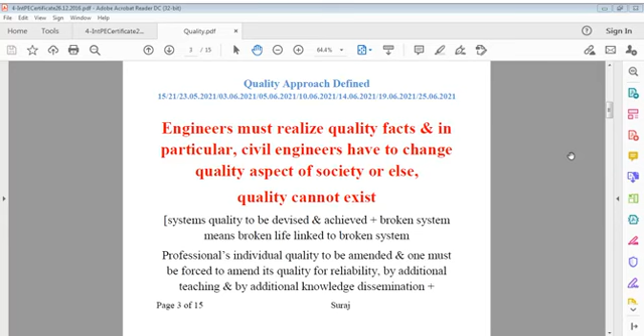Therefore individuals' improvement and update on knowledge are significant factors. Professional individual quality has to be amended or improved, and one must be forced to amend its quality for reliability achievement by additional teaching and learning, and by additional knowledge dissemination, which is a responsibility of everyone. A relevant element or product's defined quality has to be achieved.

Attitude of an individual must be streamlined. Streamline here is a very important term - the stream of profession, stream of activity, must be brought to a certain line on which your quality criteria is defined. At least it must be brought to that line. If it doesn't go above that - well, if it goes above that, it's valued.

Individual's dedication has to be applied on actions. You cannot go without that. And if you go without that, you do not really work - you just waste time, waste material, waste everything.

Commitment towards work is very important. It has to be made, it has to be fulfilled for the purpose of successful production and delivery, and all other parameters to deal with what requirements are to be done.

It's easy to say I designed this. Very easy to say, okay you designed it, fine. That is your exclusive input of your knowledge, of your application of experience and theoretical knowledge. But otherwise, experience is very important. Every individual learns something on the job. Some learn everything, and somebody doesn't work at all and doesn't learn anything.

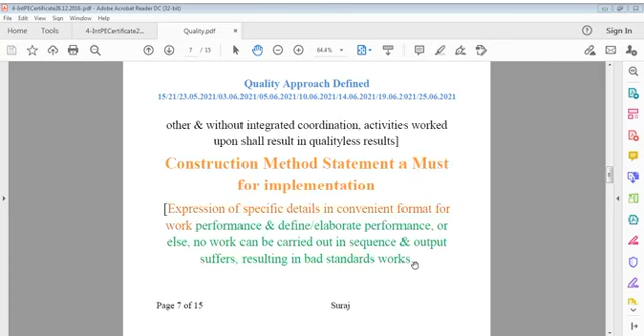No need to explain again and again, it is very important. Cost is very important. Time is very important. Risks are very important, which you have to know based on your pragmatism, based on your vision. What shall we face as problem if you don't do this? And if you do this, to what level can we solve our problem? This means you have problems as input, you have solutions as output, and that solution is given after conducting a lot of study of analysis, a lot of study of dependability of this product's nature.

Then we can say risk can also be classified based on cost, based on time, based on considerations. Risk must be foreseen, it can be foreseen by an experienced person, for the purpose of resolution, for the purpose of removing damages. Damages are not tenable and must be taken care of in advance.

Those engineers who are experienced, who have real experience, they enjoy work, they never weep, they never cry. Inexperienced engineers may prove inefficient in such situations because they could not foresee, or they cannot foresee. It will take time for their development. You can say risk is very important to be understood.

Risk-based emergencies must be understood. Therefore, thorough deliberations or brainstorming must be conducted based on available data input. Risks must be clearly defined to reach its resolution and to convert work inconvenience to work convenience.

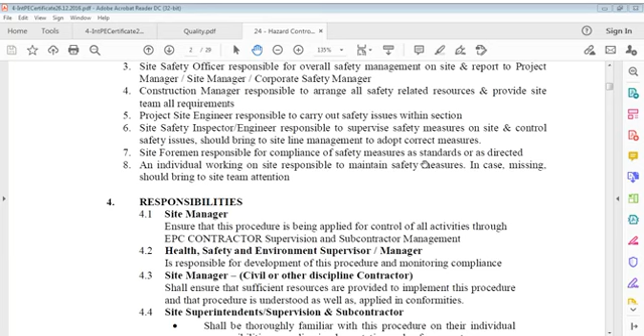It's a very important point that we could not understand what this hazard is. If you could not understand this hazard, then what is hazard, you can say. What is hazard? Why do you call it hazard? It's something undefined. Hazards are something that's undefined, and it may depend on person to person, from person to person.

It's really an important point that we have to understand how hazards can be dealt with, how the unforeseen can be handled. It's kind of unforeseen, something like this happens, and until it happens and is experienced, then hazard can be replaced by something else. Important point. We always say job hazard analysis, this analysis. We can say we do that, but is that enough?

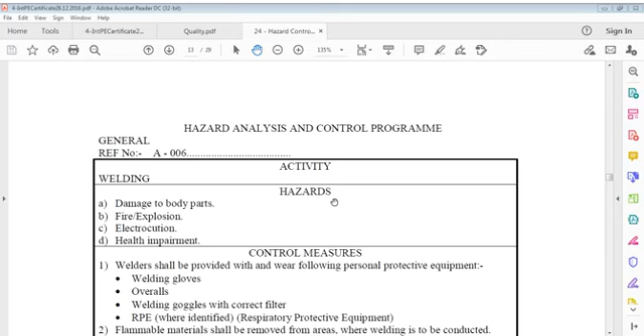Now it's term of safety, because I have talked on the issue of quality, issue of some related safety we have gone through. Now we come to the topic that is safety, health and environment.

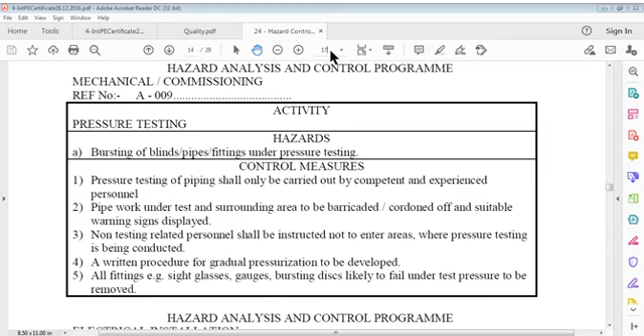Safety is not so simple. First of all, one should be serious about that. If we are not serious, we shall make others non-serious.

Safety is not so straightforward. It plays with everybody. It also sometimes makes someone be serious and risky. Those should not, but persons feel like that, because it gives some bother sensation also. It gives some improper feeling also to everybody. And after all, it's important in all work conditions.

It may be work in office or work on field. Of course, work in office is not physically oriented but mental oriented. You have to bear safety everywhere. You have to bear risk everywhere. There is no place on earth where some kind of safety is not involved.

It's very important. We have to understand safety input, and that's the reason that I try to collect whatever I can from the store of my experience and share whatever right or wrong knowledge I can share with you.

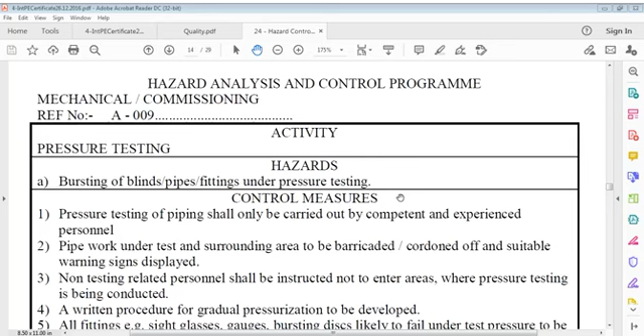We have to consider pressure test. Well, I think we did it before also. Pressure testing, we did in welding as well. There are so many classes of welding, and we can consider that. I still remember that time we talked of something likewise. Well, I think pressure testing, was it there or no?

Hazards controls, there must be a document. I think we did it. Let me check if I can find it for you, because it doesn't cost much except for seconds. It means sometimes you have to also divert your time to attainments, and it must be there.

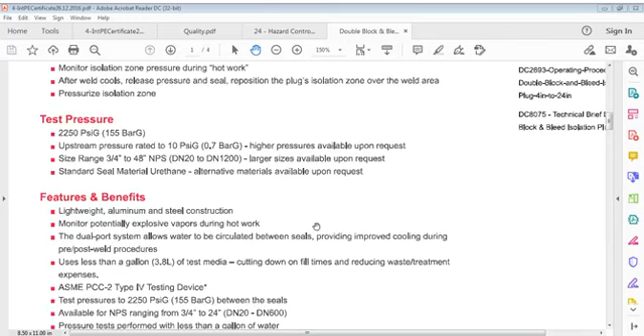And there's a little explanation, no problem. If it's effective, little is also good. I should not say everything should be according to our wish. We must say this.

Safe and effective pipe testing, let us say. Double block pressure testing, I can say here. Pressure testing. I can just save it for better understanding.

In addition, the volume of water required for a test is so small that testing can be accomplished using a hand pump.

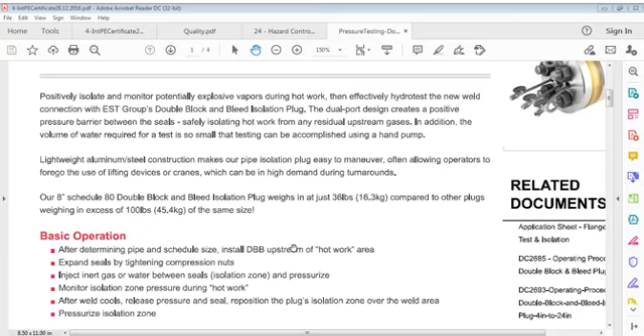Basic operation: after determining pipe and schedule size, install DBB, that is double block and bleed, upstream of the hot work area. Expand seals by tightening compression nuts.

Inject inert gas or water between seals into the isolation zone and pressurize. Monitor isolation zone pressure during hot work. After the weld cools, release pressure and seal. Reposition the plug's isolation zone over the weld area and pressurize the isolation zone.

These are basic operations. I will repeat after this.

Test pressure is 155 bar G. Upstream pressure rated to 10 psi G, or 0.7 bar G. Higher pressure available upon request.

Size range is 3/4 inch to 48 inch NPS, DN20 to DN1200. Larger sizes available upon request. Standard seal material is urethane, with features and benefits including lightweight aluminum and steel construction.

Monitor potentially explosive vapors during hot work. Dual port system allows water to be circulated between seals, providing improved cooling during pre- and post-weld procedures. Uses less than a gallon, 3.8 liters, of test media, cutting down fill times and reducing waste treatment expenses.

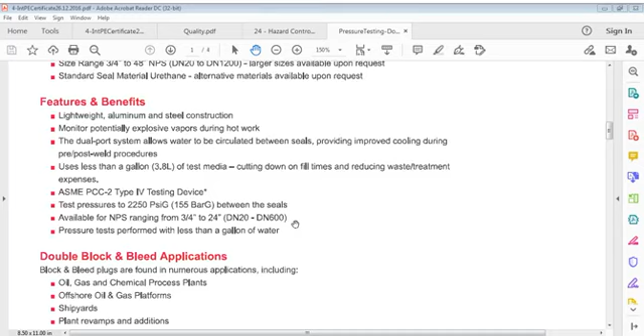Double block and bleed application. Block and bleed plugs are found in numerous applications, including oil, gas, and chemical process plants, offshore oil and gas platforms, shipyards, plant revamps and additions, piping systems, pumps, pressure vessels with flanged connections, flange replacement programs, and performing pressure tests.

Let me read first all these pages. There are a few steps in that. Step 1: now perform the steps outlined below when conducting a pressure test on 3/4 inch to 3 inch double block and bleed.

Perform the steps outlined below when conducting a pressure test on 3/4 inch to 3 inch double block and bleed isolation plugs. Step 1: attach hoses to pressure and upstream monitor connection plugs.

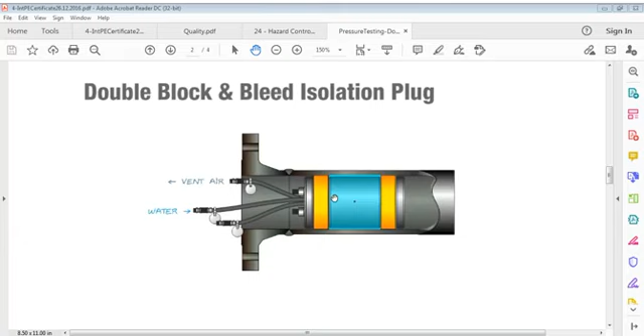So we can, we'll see this later now. Let's go back and see again. So we have to explain this in fact.

We should understand this very well before doing anything on this.

Title is double block and bleed test. It says isolation plug.

Also, I would like to see if I can find more information from here. I think I saved this file. I made this file safe. Let us see if I made it safe or not.

It must be likewise pressure testing. So I've done it, is it? I've done it, pressure testing. Let me see. No, I think I've not done it. Possibly I'm wrong. No, pressure testing, I've done it. Okay, so I've done it. So I'm a little confused with that.

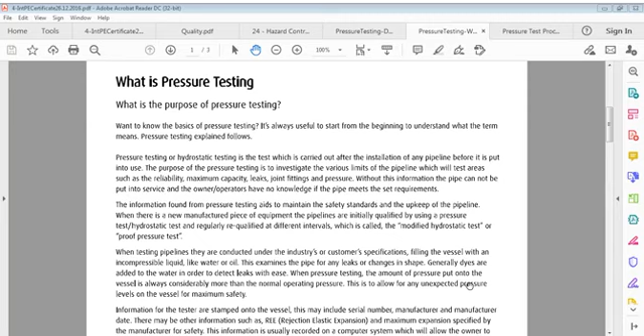We can go back to this and we can remove this from here. So we continue, like we have 3 files more here. I like to, well, let's say, what is pressure test? We can say was pressure test. Pressure test, what's that? Want to know basics, want to know basics of pressure testing. It's always useful to start from the beginning to understand what this term means.

Pressure testing explained as follows. Pressure testing or hydro testing is a procedure which is carried out after installation of pipeline before it's put into use. Means it's a procedure that's done after installation of pipeline before it's put to use.

Purpose of pressure testing is to investigate various limits of pipeline, which test areas such as reliability, maximum capacity, leaks, joints, fittings, and pressures. Without this information, pipe cannot be put into service, and owner-operators have no knowledge if pipe meets set requirements. So very easy.

Means we have to test pipe before it's put into use or it's commissioned, and after it is installed, we have to test what level of pressure it can take, and how strong it is, how reliable it is, what maximum capacity it can take, and what's the leakage status, joint fitting, etc.

This was required. So the information found from pressure test aids to maintain safety standards and upkeep of pipeline. When there is a new manufactured piece of equipment, pipelines are initially qualified by using a pressure test, hydrostatic test, and regularly requalified at different intervals, which is called modified hydrostatic test or proof pressure test.

Okay, now, is pneumatic testing more dangerous than hydrostatic testing? However, once you have successfully laid an underground pipeline, I'm just superimposing this reading.

Once you have successfully laid an underground pipeline or carried out all required hot work such as welding or post-weld heat treatment, you need to conduct a pressure test to ensure the mechanical properties of the pipe haven't been downgraded. There are two primary methods used for pressure testing: hydrostatic and pneumatic. The former is performed using water as the test medium, while the latter utilizes air, nitrogen, or another non-toxic, non-flammable gas to complete the inspection.

There are other differences between these two testing methods that need to be considered to choose the right option for a given application. Interestingly, pneumatic testing is considered more dangerous of the two options, as the amount of energy stored per unit volume of compressed air under test pressure is relatively high. As a result, pneumatic testing is only recommended for low pressure applications, and all inspections must feature detailed safety precautions and be overseen by senior staff. You must also ensure you have approval from the relevant authority to carry out a pneumatic test, otherwise you shall find yourself in breach of existing law.

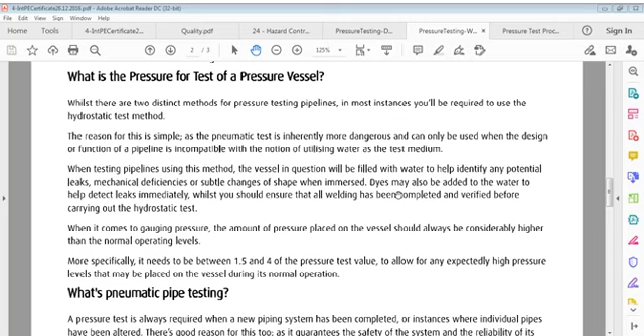When it comes to gauging pressure, the amount of pressure placed on the vessel should always be considerably higher than the normal operating level. More specifically, it needs to be between 1.5 and 4 times the pressure test value to allow for any unexpectedly high pressure levels may be placed on the vessel during its normal operation.

What's pneumatic pipe testing? A pressure test is always required when a new piping system has been completed or in instances where individual pipes have been altered. There's a good reason for this - it guarantees the safety of the system and reliability of its operation, while also identifying potential leaks. Usually pressure testing is carried out after all hot works and welds have been completed on a piping system, since post-weld heat treatment is capable of downgrading the mechanical properties of individual pipes.

There are different types of pressure tests that can be used, with pneumatic testing using air or an inert gas like nitrogen to pressurize the pipeline to 110% of its intended design capacity. The gas is then kept in the pipeline for a sustained period of time in order to gauge the system's ability to operate safely and efficiently at its maximum capacity.

Ground Force are one of the UK's and Ireland's leading suppliers to the construction industry.

Leave it now, see, we'll see. So I think Ground Force has gone. So this I can close now, pressure testing. Now we'll see pressure.

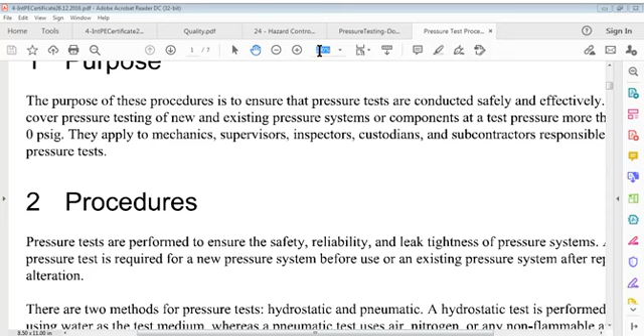What is the purpose of pressure testing? The purpose of this procedure is to ensure that pressure testing or pressure tests are conducted safely and effectively.

This covers pressure testing of new and existing pressure systems or components at a test pressure more than 0 PSI. It applies to mechanics, supervisors, inspectors, custodians and subcontractors responsible for pressure tests.

Pressure tests are performed to ensure safety, reliability and leak tightness of a pressure system. A pressure test is required for a new pressure system before use, or an existing pressure system after repair or alteration.

There are two methods for pressure tests: hydrostatic and pneumatic. A hydrostatic test is performed using water as the test medium, whereas a pneumatic test uses air, nitrogen, or other non-flammable and non-toxic gas.

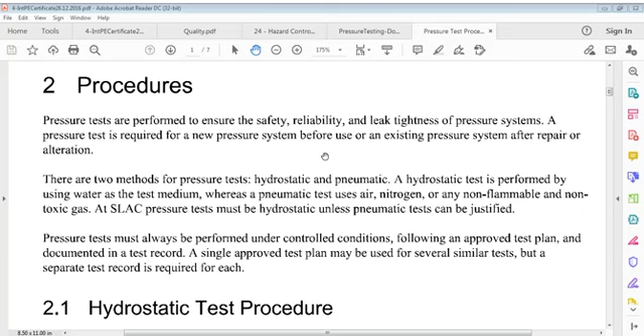Hydrostatic test is preferred. The pneumatic test cannot be used until there is justification for it. Pressure tests must always be performed under controlled conditions, following an approved test plan and documented in a test record. A single approved test plan may be used for several similar tests, but a separate test record is required.

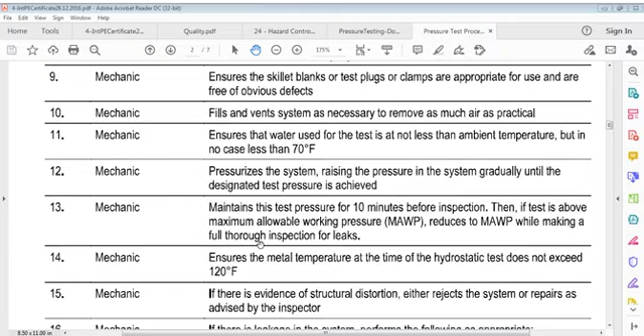Number one, mechanic obtains test pressure after consulting the project engineer. Note: when a hydrostatic test is performed on an existing pressure system, the original hydrostatic test pressure must not be exceeded.

Mechanic completes the pressure test plan and submits it for approval. Supervisor approves the plan. Pressure system program manager approves the plan, which is not required for routine testing of an existing system.

Mechanic ensures pressure gauges used have current calibration stickers, and mechanic removes all persons not directly involved with the test from the immediate test area.

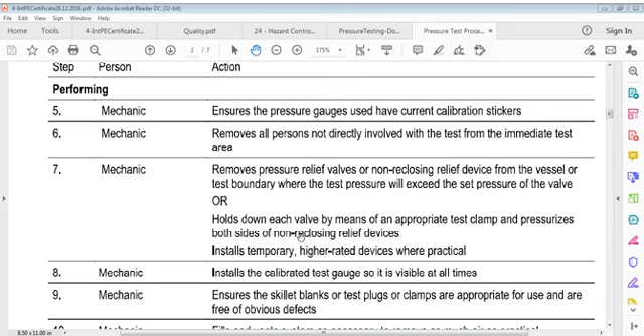Then mechanic removes the pressure relief valve or non-reclosing relief device from the vessel or test boundary where the test pressure shall exceed the set pressure of the valve, or holds down each valve by means of an appropriate test clamp, and pressurizes both sides of non-reclosing relief devices, installing temporary higher rated devices where practical.

Mechanic installs a calibrated test gauge so it is visible at all times, and ensures skillet blanks, test plugs, or clamps are appropriate for use and are free of obvious defects.

Fills and vents the system as necessary to remove as much air as practical, and ensures that water used for the test is at not less than ambient temperature.

Mechanic pressurizes the system, raising pressure gradually until the designated test pressure is achieved, then maintains this test pressure for 10 minutes before inspection. If the test pressure is above the maximum allowable working pressure, it is reduced to the maximum allowable working pressure while making a full thorough inspection for leaks.

Mechanic ensures metal temperature at the time of the hydrostatic test doesn't exceed 120 Fahrenheit. If there is evidence of structural distortion, either rejects the system or repairs as advised by the inspector.

If there is a leak in the system, mechanic performs the following as appropriate: ensures repairs are performed and returns to step 12, which is pressurizing the system gradually until the designated test pressure is achieved, or rejects the system.

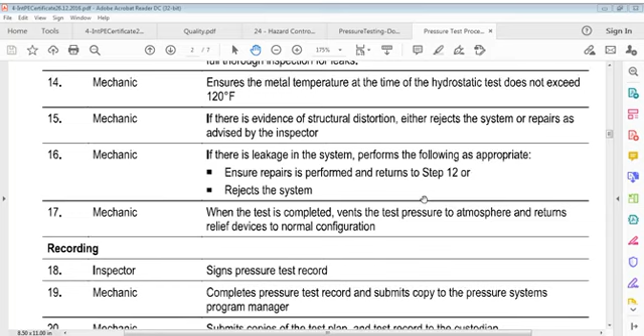When the test is completed, vents test pressure to atmosphere and returns relief devices to normal configuration. Inspector records and signs the pressure test records.

Mechanic completes the pressure test record and submits a copy to the pressure system program manager. Recording mechanic submits copies of the test plan and test record to the custodian.

Now the pneumatic test procedure. Pneumatic tests are potentially more dangerous than hydrostatic tests because of the higher level of potential energy.

Pneumatic tests may be performed only when at least one of the following conditions exist: when pressure systems are so designed that they cannot be filled with water, or when pressure systems are to be used in services where traces of the testing medium cannot be tolerated.

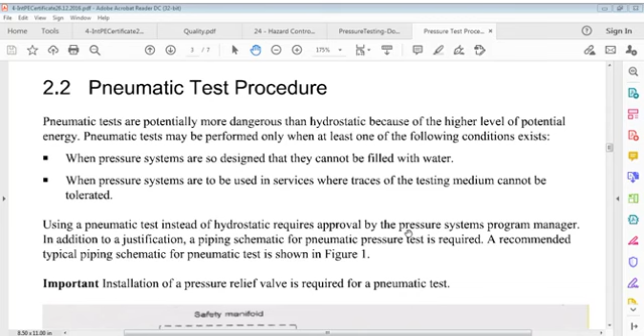Using a pneumatic test instead of hydrostatic requires formal approval by the pressure systems program manager. In addition to justification, a piping schematic for the pneumatic pressure test is required, and a diagram is shown here. Important: installation of a pressure relief valve is required for the pneumatic test.

Nitrogen, helium, argon, compressed air or house air - these are the pneumatic gases, inert and non-toxic. This is your gas cylinder for that, with its valve, and here is the regulator, relief valve, fill valve for the filling system, and here is the vent valve.

So these systems are there: one is gas cylinder valve, other is regulator, then vent valve where vent is allowed, then relief valve, and then fill valve. How many do you see? 1, 2, 3, 4, 5 systems are here - a series of 5 systems, and this is the safety manifold.

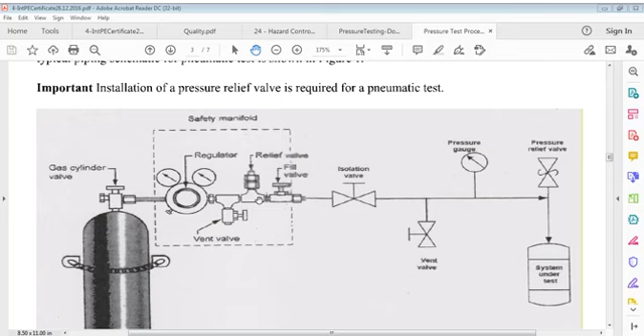In this are regulator, then vent valve, then relief valve, and then fill valve. This dotted line shows the safety manifold, and this is the gas cylinder valve. Then isolation valve here - now the system starts. Up to here you can see this is a typical piping schematic for pneumatic testing.

Again, this is the cylinder for nitrogen, helium, argon, compressed air or house air. This is the gas cylinder valve, this is the regulator, this is the vent valve, this is the relief valve, this is the fill valve. This is the safety manifold, and this is the isolation valve, and there is the system.

Vent valve again, pressure gauge, pressure relief valve, system under test. So this is the safety manifold, this is the cylinder, this is the testing controls, and there is the system. In this, isolation valve again.

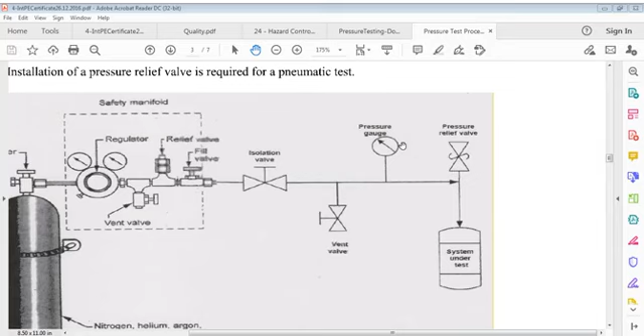Isolation valve, which is very important - when there is a problem, you can disconnect this, supply to this one. Then vent valve, like this is another vent valve, then pressure gauge, pressure relief valve, and system under test. So we go further on this.

Now what happens? The mechanic again: obtains test pressure after consulting the project engineer and ensures that pneumatic test pressure does not exceed established test pressure of the system, unless otherwise specified in design documents. Mechanic then completes the pressure test plan, including justification for pneumatic testing and a piping schematic for test, and submits for approval.

Supervisor approves the plan, pressure system program manager approves the plan. For performance, mechanic ensures that the test gauge has a current calibration sticker. A pressure relief valve or non-reclosing relief device may be installed in the test medium supply line to ensure this limit is not exceeded. Mechanic then ensures the test area is properly flagged, barricaded or otherwise controlled to prevent unauthorized personnel entry.

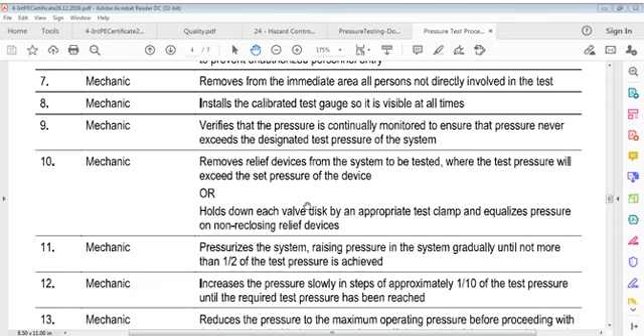Mechanic then removes from the immediate area all persons not directly involved in the test, and installs a calibrated test gauge so it's visible at all times. Mechanic verifies that pressure is continually monitored to ensure that pressure never exceeds the designated test pressure of the system. Mechanic then removes the relief device from the system to be tested where test pressure will exceed the set pressure of the device, or holds down each valve disc by an appropriate test clamp and equalizes pressure on the non-reclosing relief device.

Mechanic then pressurizes the system, raising pressure gradually until not more than half of test pressure is achieved. Mechanic increases pressure slowly in steps of approximately 10% of test pressure until required test pressure has been reached, then reduces pressure to maximum operating pressure before proceeding with inspection, holding pressure for a sufficient period of time to permit inspection of the system.

Mechanic checks the pressure gauge periodically for indication of leakage, and applies a soap solution to accessible welds, screwed pipe joints, flanges, etc. where leakage is suspected. If there is evidence of structural distortion, mechanic either rejects the system or repairs as advised by the inspector. If there is leakage in the system, mechanic performs appropriate actions to cover the leakage, ensures repair is performed, and returns to step 11 - pressurizing the system gradually until not more than half of test pressure is achieved - otherwise rejects the system.

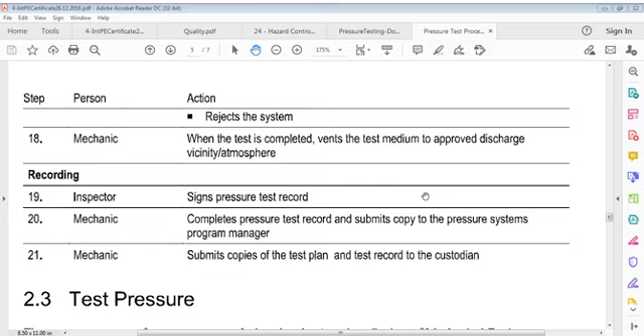When the test is completed, mechanic vents the test medium to an approved discharge vicinity atmosphere. For recording, the inspector signs the pressure test record. Mechanic completes the pressure test record and submits a copy to the pressure system program manager, and submits copies of the test plan and test records to the custodian and test pressure.

There are many types of pressure systems, designed under the American Society of Mechanical Engineers (ASME) code and repaired under the National Board Inspection Code (NBIC).

Test pressure of various pressure systems must be calculated based on the following: test pressure for new pressure vessel and piping system, as per system code, hydrostatic or pneumatic. For boiler power system, ASME section 1, 1.5 times MAWP (maximum allowable working pressure), pneumatic not permitted. For boiler heating, ASME section 4, 1.5 times MAWP, pneumatic not permitted. In boiler power and boiler heating, pneumatic is not permitted.

Then pressure vessel, ASME section 8, division 1 and division 2. In division 1, hydrostatic is 1.3 times MAWP, while pneumatic pressure is permitted at 1.1 times MAWP. In division 2, hydrostatic is 1.43 times MAWP, while pneumatic is only 1.15 times MAWP. So MAWP is always lower in the pneumatic way.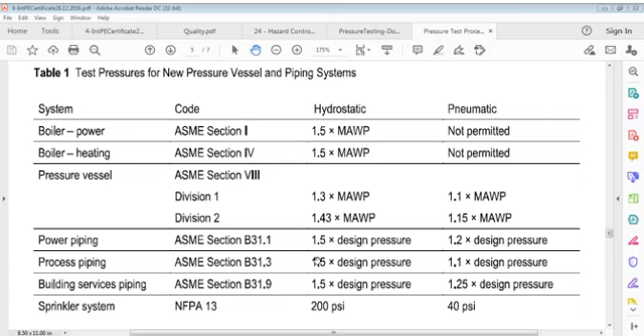Power piping, ASME section B31.1: 1.5 times design pressure in hydrostatic, while in pneumatic only 1.2 times design pressure. Same way, process piping, ASME section B31.3: 1.5 times design pressure in hydrostatic and 1.1 times design pressure in pneumatic. Building services piping, ASME section B31.9: 1.5 times design pressure in hydrostatic and 1.25 times design pressure in pneumatic. Sprinkler systems, NFPA 13: 200 psi in hydrostatic and 40 psi in pneumatic. So pneumatic is always lower than that.

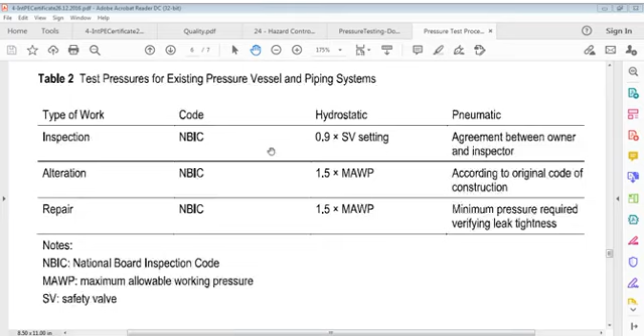Now, able to test pressures for existing pressure vessel and piping system - this was for new pressure vessel and piping system, and this is the existing one.

Inspection is a type of work code: hydrostatic and pneumatic, inspection, alteration and repair. The NBIC is the code in all these cases. Hydrostatic is 0.9 SV setting, with agreement between owner and inspector in case of pneumatic. Alteration is 1.5 MAWP according to original code of construction, and repair is also 1.5 MAWP, the minimum pressure required for verifying leak tightness.

NBIC stands for National Board Inspection Code. MAWP stands for Maximum Allowable Working Pressure. SV stands for Safety Valve.

There are forms required by this procedure. The pressure systems pressure test plan form: a detailed pressure test plan is required for every pressure test conducted at the laboratory. An approved plan may be used for several similar tests, numbered by the company, such as I-730, etc. Then there's the pressure system pressure test record form, used for separate tests recorded for each pressure test.

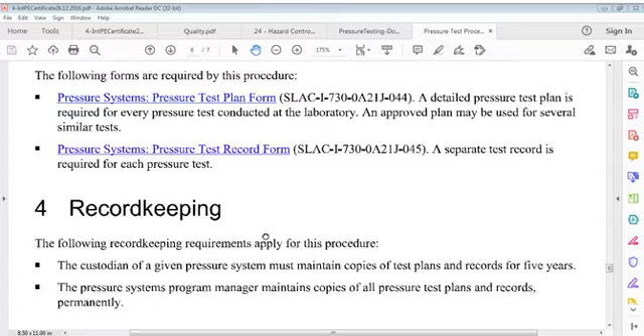That was the test plan, now record keeping. Following record keeping requirements for this procedure: the custodian of a given pressure system must maintain copies of test plans and records for 5 years. The pressure systems program manager maintains copies of all pressure test plans and records permanently.

That is the manager, and references are here. These are only references, so I'll close this one. Then, pressure testing - what is that? We have to understand that.

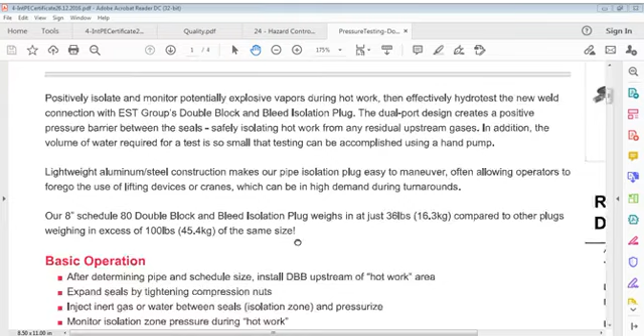The volume of water required for a test is so small that testing can be accomplished using a hand pump. Lightweight aluminum and steel construction makes our pipe isolation plug easy to maneuver, often allowing operators to forego use of lifting devices or cranes, which can be in high demand during turnarounds. An 8 inch schedule 80 double block and bleed isolation plug weighs just 16.3 kg compared to other plugs weighing in excess of 45.4 kg of the same size.

Basic operations: after determining pipe and schedule size - schedule size is very important - install the DBB upstream of the hot work area. Expand seals by tightening compression nuts. Inject inert gas or water between seals at the isolation zone and pressurize. Monitor isolation zone pressure during hot work. After the weld cools, release pressure and seal, reposition the plug's isolation zone over the weld area, and pressurize the isolation zone. This is the basic operation.

Again: after determining pipe and schedule size, install DBB upstream of the hot work area. Expand seals by tightening compression nuts. Inject inert gas or water between seals and pressurize. Monitor isolation zone pressure during hot work. After the weld cools, release pressure and seal, reposition the plug's isolation zone over the weld area, and pressurize the isolation zone. Now, test pressure.

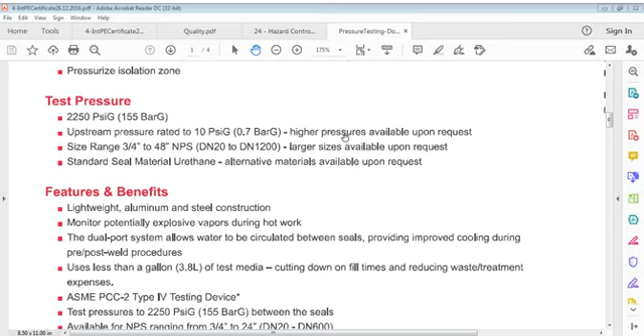So we can say test pressure is 155 bar G. Upstream pressure rated to 0.7 bar G. Higher pressure available upon request. Similarly, size range is DN20 to DN1200, with standard seal material urethane. Then features and benefits.

Lightweight aluminum and steel construction. Monitor potentially explosive vapor during hot work. Dual port system allows water to be circulated between seals, providing improved cooling during pre and post weld procedures. Uses less than a gallon of test media, cutting down on fill times and reducing waste treatment expenses.

ASME PCC2 Type 4 testing device. Test pressures up to 155 bar G between seals. Available for NPS ranging from DN20 to DN600. Pressure test performed with less than a gallon of water. Double block and bleed application.

Block and bleed plugs are found in numerous applications, including oil, gas and chemical process plants, offshore oil and gas platforms, shipyards, plant revamps and additions, piping systems, spools, pressure vessels with flange connections, flange replacement programs, and performing tie-in work as well.

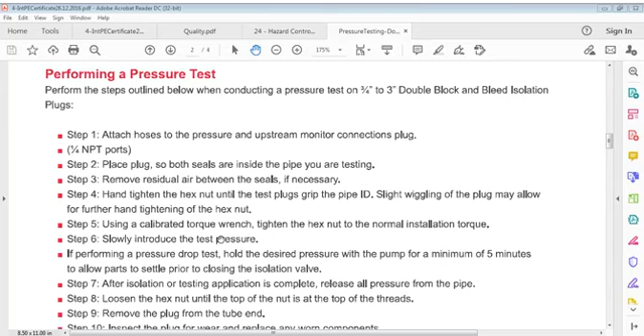Performing a pressure test. Perform the steps outlined below when conducting a pressure test. I did this before, on 3/4 inch to 3 inch double block and bleed isolation plugs. Now there are how many steps? There are 10 steps in this. We talked of this previously also, but we speak again, no problem.

Step 1. Attach hoses to pressure and upstream monitor connection plug, 1/4 NPT port. Step 2. Place plug so both seals are inside the pipe you are testing.

Step 3. Remove residual air between seals if required. Step 4. Hand tighten hex nut until test plug grips pipe ID. Slight wiggling of the plug may allow for further hand tightening of the hex nut. Step 5. Using a calibrated torque wrench, tighten hex nut to normal installation torque.

Step 6. Slowly introduce test pressure. If performing a pressure drop test, hold desired pressure with pump for a minimum of 5 minutes to allow parts to settle prior to closing the isolation valve.

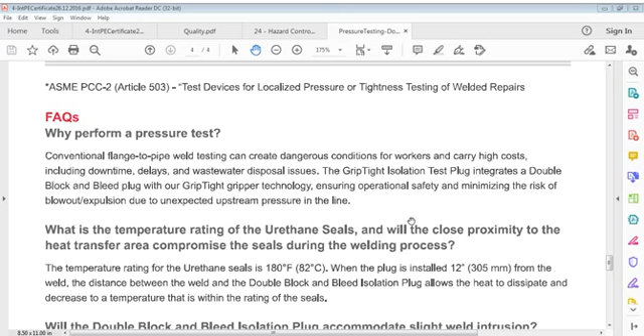Why perform a pressure test? This is ASME PCC2 Article 503: test devices for localized pressure or tightness testing of welded repairs. Why perform a pressure test in welding? This is why perform a pressure test on welding, can say: test devices for localized pressure tightness test of welding repairs.

Conventional flange to pipe weld testing can create dangerous conditions for workers and carry high costs, including downtime, delays and wastewater disposal issues. Grip tight isolation test plug integrates a double block and bleed plug with our grip tight gripper technology, ensuring operational safety and minimizing risk of

blowout expulsion due to unexpected upstream pressure in line. The grip tight isolation test plug integrates a double block and bleed plug with our grip tight gripper technology, ensuring operational safety and minimizing risk of blowout expulsion due to unexpected upstream pressure in line.

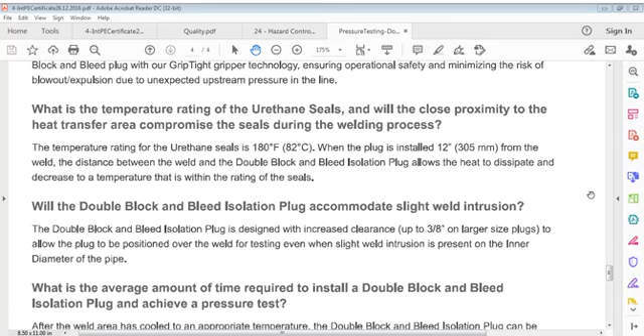Question: shall the double block and bleed isolation plug accommodate slight weld intrusion? The double block and bleed isolation plug is designed with increased clearance, up to 3/8 inch on larger size plugs, to allow the plug to be positioned over the weld for testing even when slight weld intrusion is present on the inner diameter of the pipe.

What can we say now? What is the average amount of time required to install a double block and bleed isolation plug and achieve a pressure test? After the weld area has cooled to an appropriate temperature, the double block and bleed isolation plug can be used to complete pressure tests in as little as 10 minutes from insertion to removal.

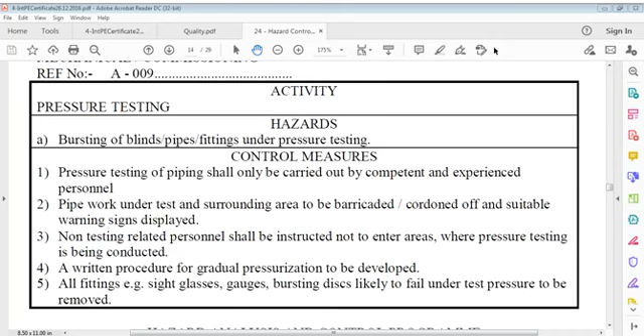Now we come to handling of cable drum. There is a hazard that cable drum can fall and cause trap injuries. Damaged cable drums not to be used, and vehicles to be located suitably with regard to site traffic, and the area for offloading to be barricaded off.

Cable drums to be loaded and offloaded using slings of adequate strength to sustain the working load safely. This operation is to be carried out by experienced and competent personnel. Cable jacks to be placed on even surfaces. Cable drums shall be located on cable jacks of suitable capacity and base designed for this purpose.

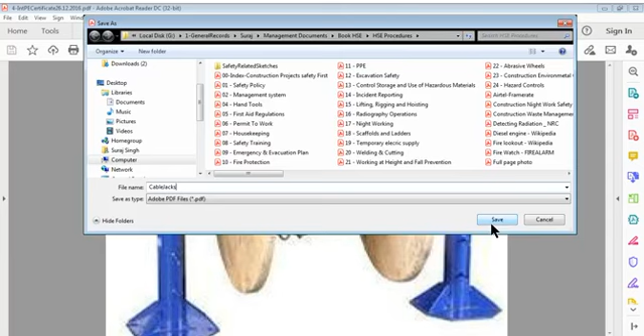Cable jacks, alright. So this was what we talked of, cable jacks. You can say this is the jack here, you can blow it up and see. These jacks must be on even ground. That's the possibility here. So cable jacks to be placed on even surfaces.

Cable drums shall be located on cable jacks of suitable capacity and base designed for this purpose. Protruding nails on cable drums to be removed or bent over. What is that? It means there may be some nails here, which should be taken out or bent, so that it doesn't hamper some people. Cable drums to be checked when stored.

And also cable pulling, we had cable pulling. What's that? Maybe, I think maybe in this, hold on. Maybe it is somewhere in this sketches, cable pulling. Yes, I think this is in sketches, cable pulling, so no problem. I'll take a photograph of this again for your use. And that is cable pulling, this is cable pulling here.

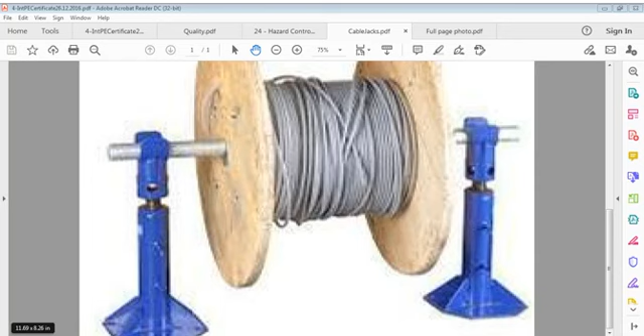Let's see what cable termination is. Okay, cable termination - we can save the file as cable termination here. Cable termination, cable termination 1. I'll take this off, no need for cable jacks now, I can take that off too. So we are now concentrating on cable termination because that's the important one. Let's go back to this one, cable termination 1.

Type of electrical joints and terminations. This is cable termination 2. I'm not finding the cable termination options. Okay no problem, let's say cable termination part 1, tecratools.com, engineering electrical equipment, types of electrical joints and terminations. Is it very long, I think? No problem, let's just have a look at this electrical equipment, it's possible.

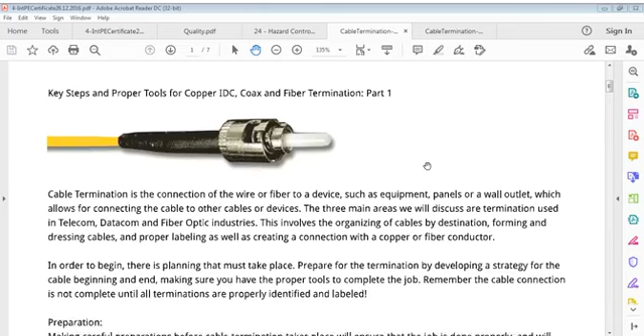Cable termination is the connection of wire or fiber to a device, such as equipment, panels, or a wall outlet, which allows for connecting cable to other cables or devices. The three main areas we discuss are termination used in telecom, datacom, and fiber optics industries. This involves organizing cables by destination, forming and dressing cables, proper labeling, and creating a connection with a copper or fiber conductor.

In order to begin, there is planning that must take place. Prepare for termination by developing a strategy for the cable's beginning and end, and make sure you have the proper tools to complete the job. Remember, cable connection is not complete until all terminations are properly identified and labeled. Making careful preparations before cable termination ensures the job is done properly and saves time and money from the onset.

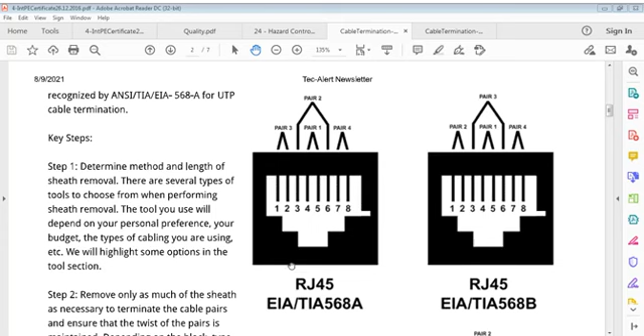Here is A, you can see 8 points are here, same RJ45. This is 568B, and there is BNC 10 base 2, and this is here RJ45 base T. So that is what it means.

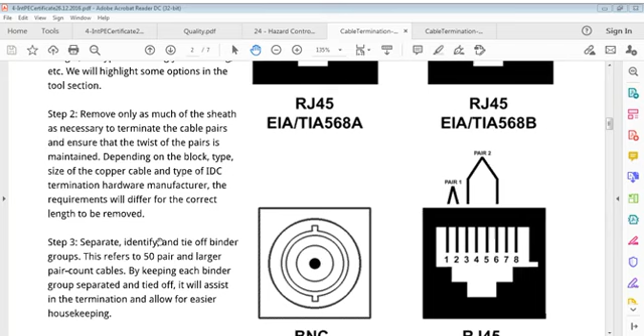It says remove only as much of sheath as necessary to terminate cable pairs and ensure that twist of pair is maintained, depending on block type, size of copper cable, and type of IDC termination hardware manufacturer. Requirements differ for correct length to be removed.

Step 3: separate, identify, and tie off binder groups. This refers to 50 pair and larger pair count cables. By keeping each binder group separated and tied off, it assists in termination and allows for easier housekeeping.

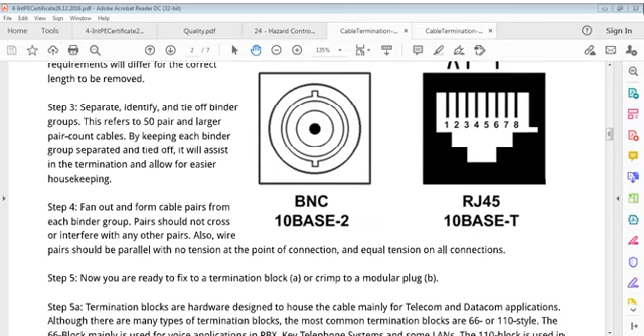Step 4: fan out and form cable pairs from each binder group. Pairs should not cross or interfere with other pairs. Also, wire pairs should be parallel with no tension at point of connection and equal tension on all connections.

Step 5: now you are ready to fix to termination block or crimp to a modular plug. Step 5A: termination blocks are hardware designed to house cable mainly for telecom and datacom applications. Although there are many types of termination blocks, the most common are 66 or 110 style.

The 66 block is mainly used for voice applications in PBX, key telephone systems, and some LANs. The 110 block is used in both voice and data cabling applications. Using a 66 block, twisted pairs are fanned through one by one and punched down onto the block for termination. Using a 110 block, wires come through the center and fan out, being punched down into each slot in the block for termination.

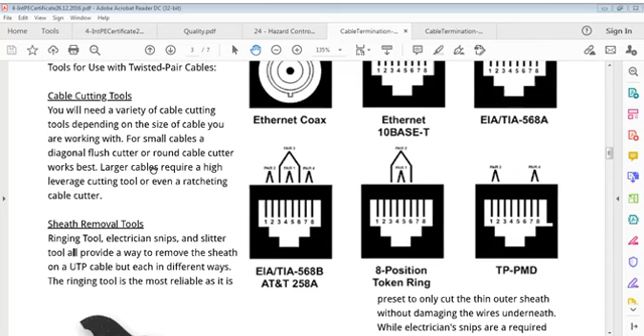Tools for use in twisted cable: now, cable cutting tool. You need a variety of cable cutting tools depending on the size of cable you're working with. For small cables, a diagonal flush cutter or round cable cutter works best. Larger cables require a high leverage cutting tool or even a ratcheting cable cutter.

Sheath removal tools: ringing tool, electrician snips, and slitter tool all provide a way to remove sheath on a UTP cable, but each in different ways. The ringing tool is most reliable as it is precise to only cut the thin outer sheath without damaging wires underneath, while electrician snips are a required trimming tool for whatever termination job. Punch down tool:

Select high quality punch down tools with the proper blade for the type of termination block being used: 66, 110, Krone, Bix, etc. Don't skimp on this tool, as you will find yourself using it constantly.

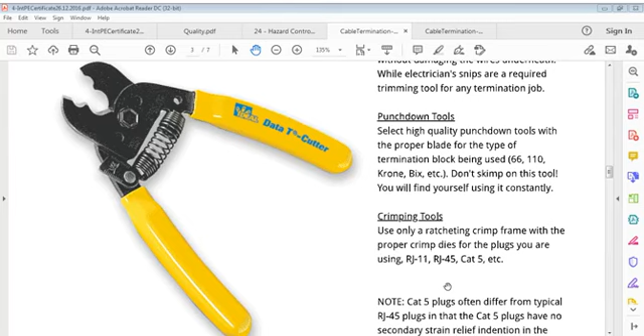Crimp tool: use only a ratcheting crimp frame with proper crimp dies for plugs you are using, such as RJ11, RJ45, Cat5.

Cat5 plugs often differ from typical RJ45 plugs in that Cat5 plugs have no secondary strain relief indentation in the plug body. This is done to help maintain twist in wire pairs as they move through the plug body. If you're using Cat5 plugs like this, you need to use proper Cat5 crimping dies when crimping these plugs. Failure to use the proper Cat5 dies will crush the plug body and ruin the connector.

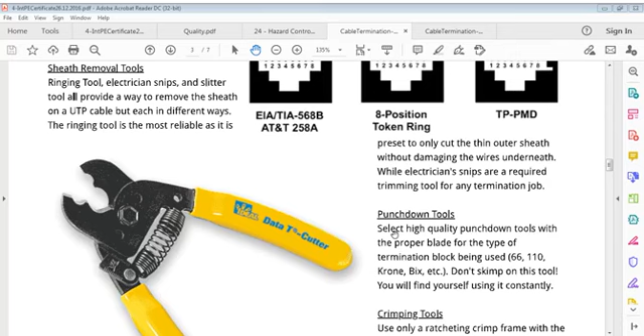So this was the tool. We have punch down tools here, the sheath removal tool, cable cutting tool. We have gone through cable cutting tool, sheath removal tool, punch down tool, crimping tool. Then we can move to tool kits, tool cases, and coaxial cable termination.

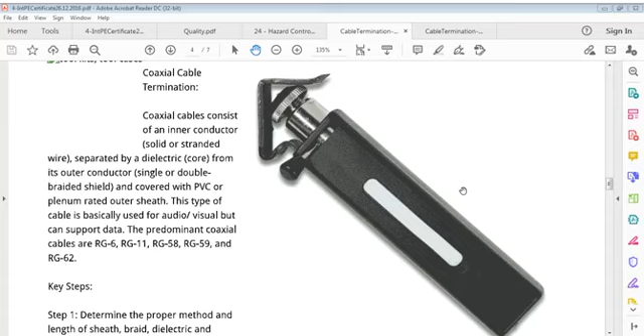Coaxial cable consists of an inner conductor, solid or stranded wire, separated by a dielectric core from its outer conductor, single or double braided shield, and covered with PVC or plenum-rated outer sheaths. This type of cable is basically used for audio visual but can support data. Predominant coaxial cables are RG-6, RG-11, RG-58, RG-59 and RG-62.

Key steps: determine proper method and length of sheath, braid, dielectric and center conductor removal. Start by making a straight cut in the termination end of cable. Next, place connecting ferrule over end of cable.

Adjust a 2 or 3 step coax stripping tool to meet desired cable diameter and stripping requirements. Insert cable into stripper, rotating stripper 3 to 5 full turns. Remove severed sheathing, shielding and dielectric material while inspecting strip quality, making sure there are no stray strands of braided shield, nicked center conductor, or damaged insulation.

Step 2: terminate cable by seating connector system pin on center conductor. Crimp pin into center conductor using a dedicated center pin crimping tool, or the less desirable small diameter die nest of crimping tools. Step 3: insert sleeve and connector onto cable.

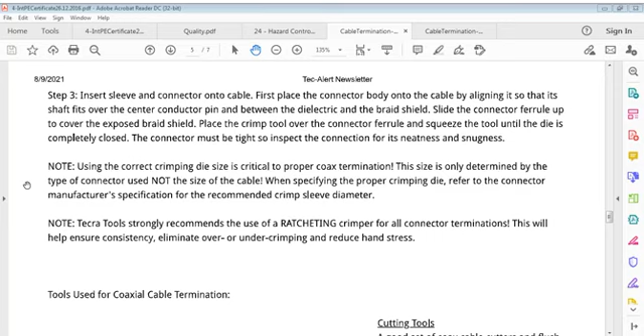This size is determined only by the type of connector used, not the size of cable. When specifying the proper crimping die, refer to the connector manufacturer's specification for recommended crimp sleeve diameter.

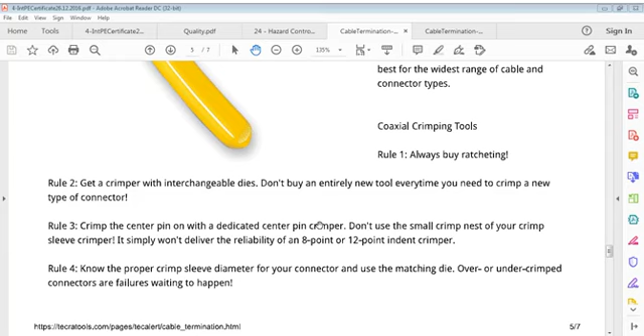Now, coaxial crimping tools - Rule 1, Rule 2, Rule 3, Rule 4. Rule 1: always buy ratcheting. Rule 2: get a crimper with interchangeable dies. Don't buy an entirely new tool every time you need to crimp a new type of connector. Get a crimper with interchangeable dies.

Rule 3: crimp the center pin on with a dedicated center pin crimper. Don't use the small crimp nest of your crimp sleeve crimper - it simply won't deliver the reliability of an 8 or 12 point indent crimper. Rule 4: know the proper crimp sleeve diameter for your connector and use a matching die - over or under crimped connectors are failures waiting to happen.

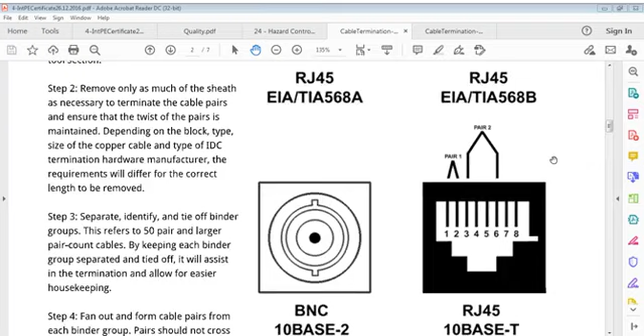Click OK, now go back to tech alert, return to top page. So this is the toolkit, so that's what it was. So we've seen this as an important one we've gone through, and it's really interesting to know some tools for practical purposes.

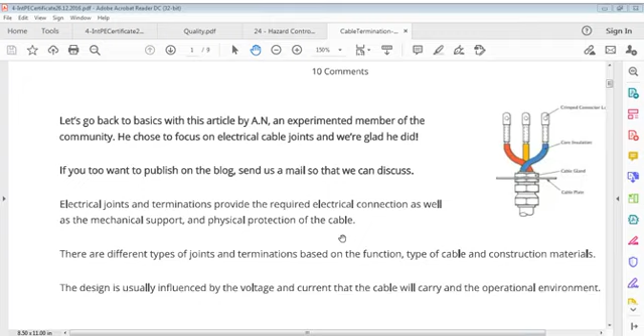Let's go back to basics with this article by an experienced member of the community. He chose to focus on electrical cable joints, and we're glad he did. If you too want to publish on the blog, send us a mail so that we can discuss. Electrical joints and terminations provide required electrical connections as well as mechanical support and physical protection of cable. There are different types of joints and terminations based on function, type of cable, and construction materials. Design is usually influenced by voltage and current that the cable carries and the operational environment.

Electrical power cable termination. Electrical cable termination is the physical and electrical connection of a cable end that connects to another cable or to a terminal of equipment. Cable terminations are often designed to enable physical and electrical connections of two cable ends, or a cable end and terminal on equipment, such as a low voltage cable and electrical equipment.

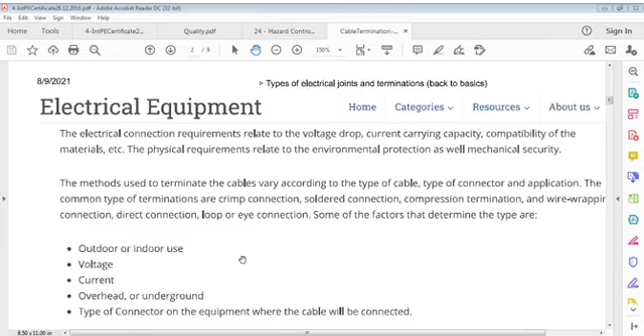Electrical connection requirements relate to voltage drop, current carrying capacity, compatibility of materials, etc. Physical requirements relate to environment protection as well as mechanical security. Methods used to terminate cables vary according to type of cable, type of connector and application.

Common types of terminations are crimp connection, solder connection, compression termination, wire wrapping connection, direct connection, and loop or eye connection. Some factors that determine the type are outdoor or indoor use, voltage, current, overhead or underground, and the type of connector on the equipment where the cable is to be connected.

Electrical power cable joints. Cable joints are used to connect low, medium or high voltage cables. The type of cable joint, sizes, shapes and configurations vary according to voltage, structure, insulation and number of cores of cable to be joined. Joints provide electrical insulation as well as mechanical protection and strength.

Electrical connection is made in various ways and can use crimp or mechanical connectors, soldering, etc. Voltage: joints are designed for low, medium or high voltages, and it's important to match the capacity of the joint to that of the cable. Otherwise a low power cable joint will fail if subjected to high current.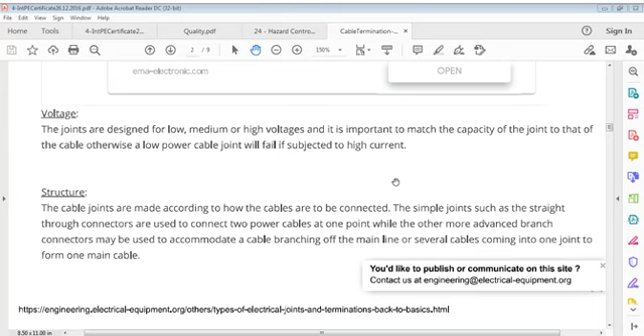Structure: cable joints are made according to how cables are to be connected. Simple joints such as straight through connectors are used to connect two power cables at one point, while more advanced branch connectors may be used to accommodate cable branching off a main line, or several cables coming into one joint for a main cable. There are different cable insulations depending on the application of the cable, and the cable joint must be compatible with the cable insulation.

To maintain insulation of jointed cables, there are varieties of insulation procedures, which can be either heat or cold shrink cable insulation, molded type of insulation, or use of tape. Types of electric power cable joints: there are about 4 commonly used types. These differ in mechanical arrangement and where they are used. However, some manufacturers may provide custom designs to suit unique customer requirements.

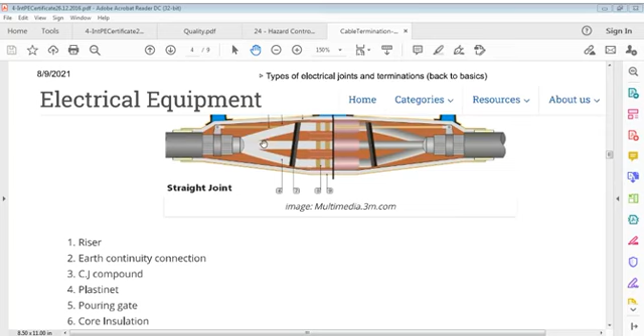Straight through joints, branch joints which can be T or Y type, pot ends, and indoor or outdoor terminations. The straight through joint is the most used type, used to extend pieces of electrical cable. A typical joint is shown in the figure, with three points coming in on each side forming the straight joint. This includes the riser, earth continuity connection, CJ compound, plastinet, pouring gate, core insulation, PVC, NA tape, ferrule, and BOPP tape in two layers, each half overlapped over the plastinet.

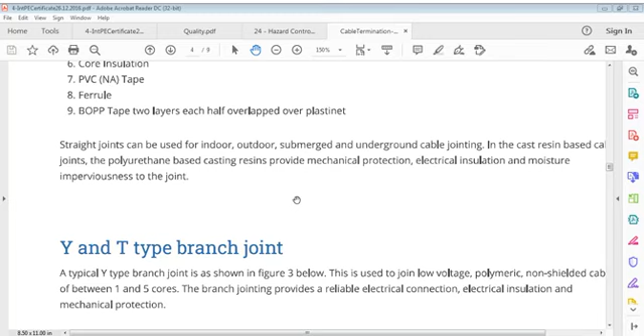Straight joints can be used for indoor, outdoor, submerged and underground cable jointing. Cast resin based cable joints: polyurethane based casting resins provide mechanical protection, electrical insulation and moisture imperviousness to the joint.

Y and T type branch. A typical Y type branch joint is used to join low voltage, polymeric, non-shielded cables between 1 and 5 cores. Branch joining provides a reliable electrical connection, electrical insulation and mechanical protection. Connectors are either compression or mechanical type. Branch joints can be used for indoor, outdoor, submerged and underground cable jointing.

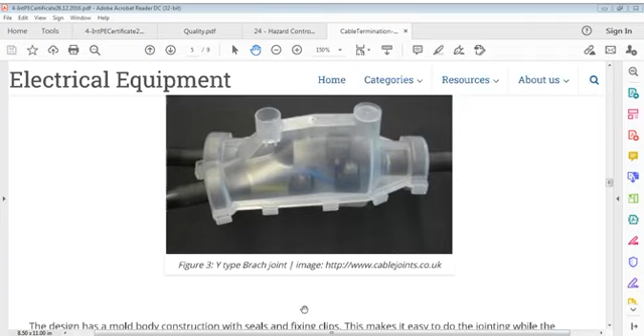Design has a mold body construction with seals and fixing clips. This makes it easy to do jointing, while sealing eliminates need to tape joint.

Pot end joints are used at live voltage cable ends. In a typical cable, each core is sealed separately using heat shrink cable end caps. Screen bandage is then applied to provide earth fault protection, and the combination is then covered with thick wall heat shrink cable. Pot end joints are suitable for temporary and permanent cable abandonment to provide safe termination of live power cables for indoor, outdoor, as well as underground cables.

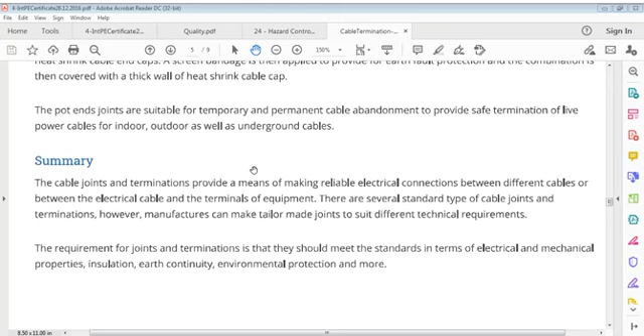Now for the summary: cable joints and terminations provide a means of making reliable electrical connections between different cables, or between an electrical cable and terminals of equipment. There are several standard types of cable joints and terminations.

However, manufacturers can make tailor-made joints to suit different technical requirements. The requirement for joints and terminations is that they should meet standards in terms of electrical and mechanical properties, insulation, earth continuity, environment protection, and more.

So I think that's what it is. So our paper has gone through. We can say we learned something about cable jointing in this way, and it must be appreciable.

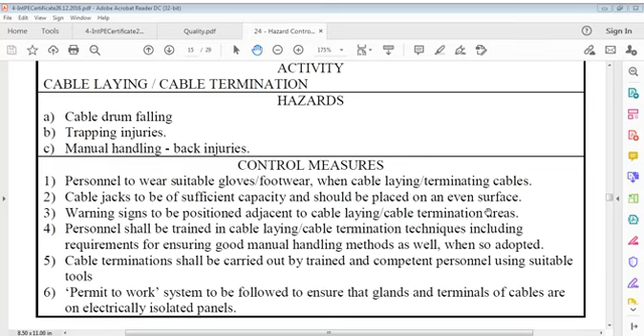So we can close this and say: cable jointing includes cable laying, cable termination, and there are hazards such as cable drum falling, trapping, injury, manual handling, back injuries. Personnel to wear suitable gloves and footwear. For cable laying and termination, cable jacks should be of sufficient capacity and placed on an even surface. Warning signs to be positioned adjacent to cable laying and cable termination areas.

Personnel shall be trained in cable laying and cable termination techniques, including requirements for ensuring good manual handling methods. Cable termination shall be carried out by trained and competent personnel using suitable tools. A permit to work system is to be followed to ensure that glands and terminals of cables are on an electrically isolated panel.

And then material handling is different. Our electrical part of the quality system has been explained. It's very important - I have to explain everything that the quality system desires and tells. It's not easy, but it is to be done that way.

I think that's time to probably stop, as 3 hours have gone. We have to... the system is about job hazard analysis and assessment.

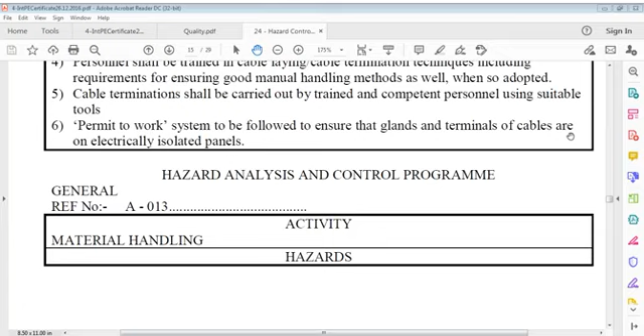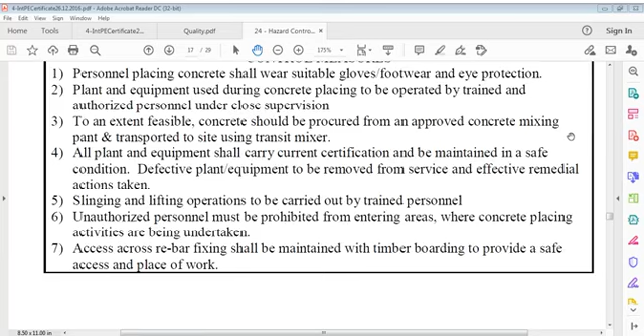Material handling, we have to do it. Manual handling it is, and it is now 13 we have to study - that is manual handling. Then we have handling of steel, handling of timber, concrete pours, steel fixing, civil work, backfilling of excavations. Then transportation, lifting of heavy equipment, and after that scaffold, temporary works, scaffolding, then maintenance of scaffolding, dismantling of scaffolding.

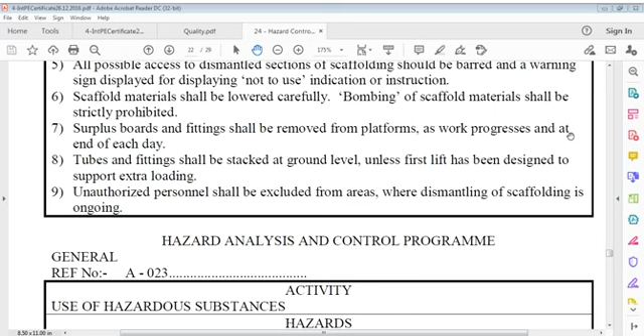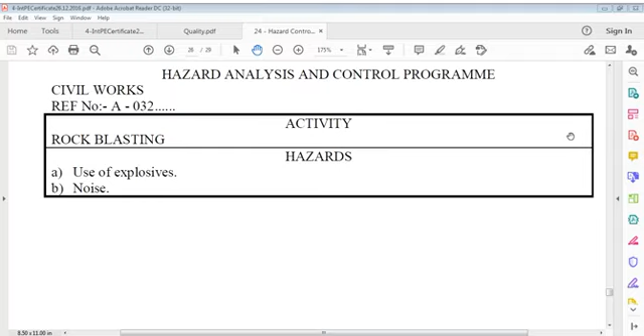Hazardous substances - we have use of hazardous substances, then erection of fencing, fabrication of gates, after that erection of gates. We have removal of waste material, then erection of steel work, installation of pipeline and valve fittings, electrical work, rock drilling, civil works, rock blasting, site preparation, site transport, and I think that's it.

So what I say, we have to understand.

Safety is the responsibility of each and every one. This is a very important point, and we understand in our statement of quality what we have said: no safety, no pain. You know this one. Very important.

And quality system in safety, actually we are talking - we are trying to explain what is required in the system of safety to an extent. Quality of safety is maintained.

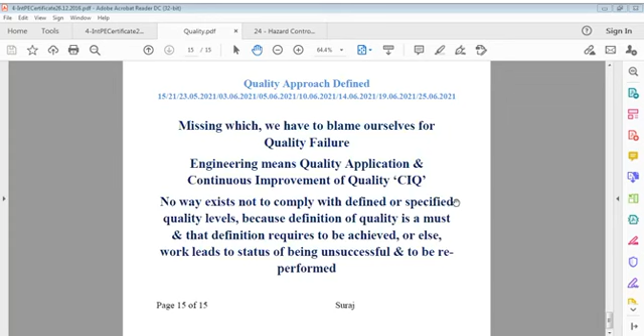So that's an important point, and we'd like to close it now. Only point that I was interested in, is that quality and safety, health, environment, ergonomics must be taken care of by everyone. It's important, cannot be ignored, and if we ignore it, that's another point - we ignore ourselves.

That we have to think of. It's not simply that we can just move on. No, it's not that. We have to understand every activity before just doing that.

It's very important from this point of view. I say let's close this now and see how it shall work. So now I stop it. Thank you very much.